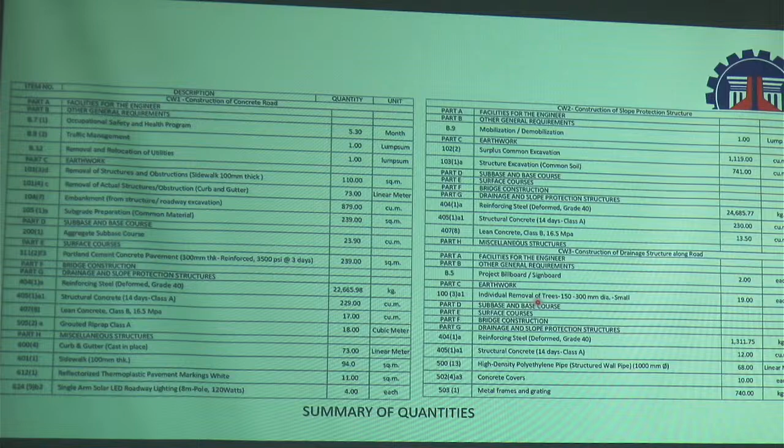So we're here at Gov. Pack Road, from Chainage 18 to Chainage 91. At the end of the project is the existing PCC pavement that leads into the entrance of the SM parking.

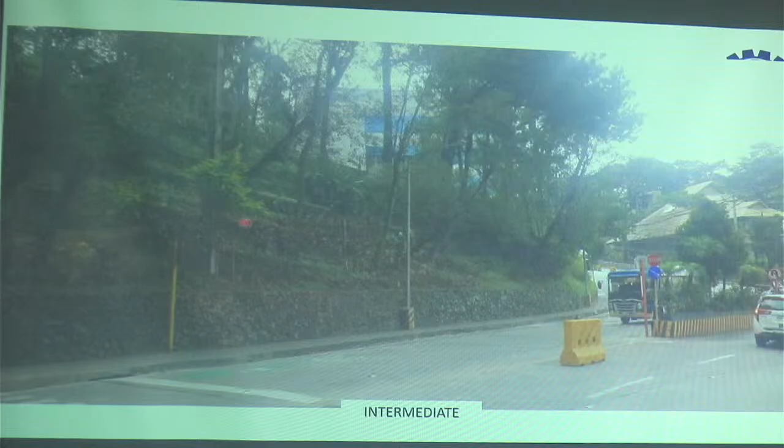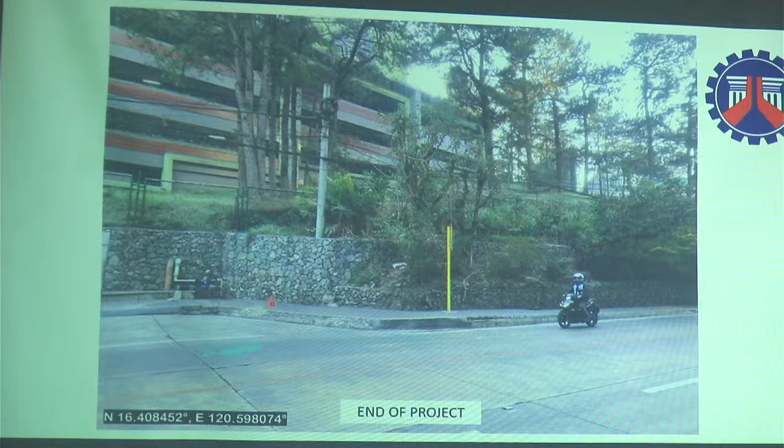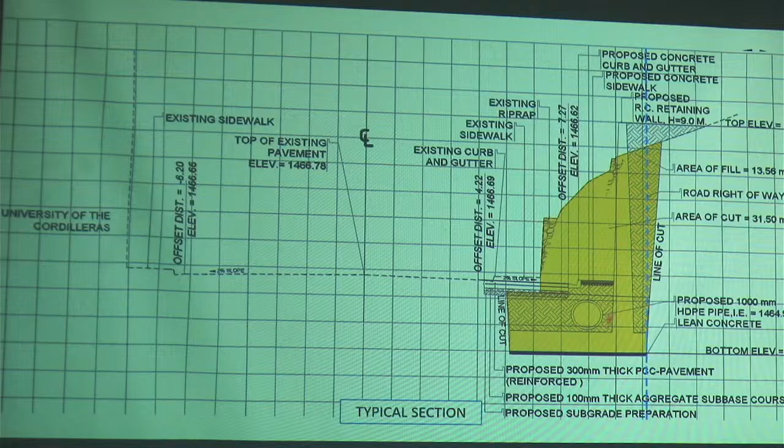This is the typical cross section showing the proposed structures: the retaining wall, sidewalk, curb and gutter, PCCP one lane, and the HDPE pipe. These are the details of our manhole covers and inlets, included in the approved plan, and the detail of our grouted riprap. The total length of the proposed riprap is 8 meters.

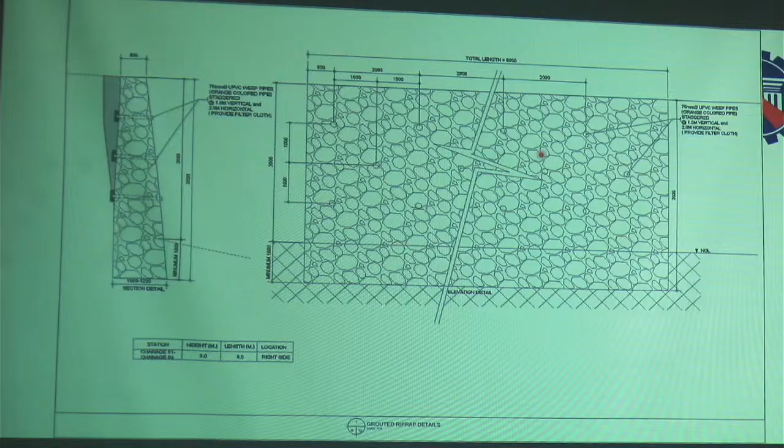For the retaining wall structures, we have a height of 9 meters equivalent to 27 meters, and also 7 meters equivalent to 23 meters, and also 9 meters on the second terrace equivalent to 15 meters. This is our detail for the solar street lights, with the specifications also included in our approved plan.

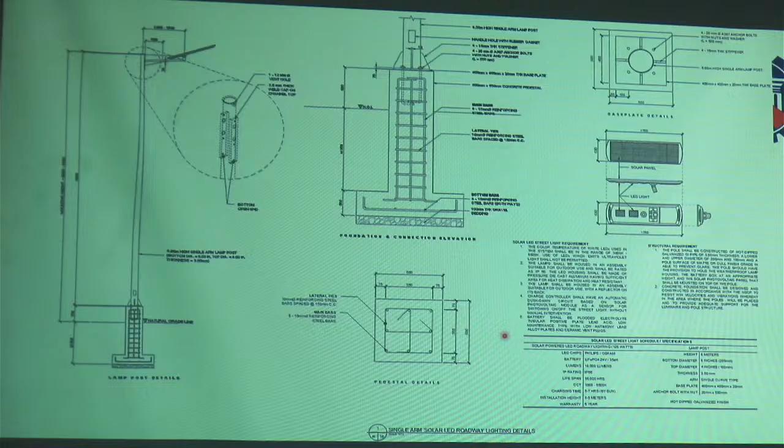So yun lang po sa ating first project with the contract ID of 26PD0027.

So for our next project, network development, road widening secondary roads, Harrison Road number 2 at Chainage 190 until Chainage 235, with a duration of 130 calendar days, with a length of 45 meters and amounting to 6,434,680 pesos. So, ito yung scope of work naman sa Harrison Road, road widening, reinforced concrete, retaining wall and grouted riprap, sidewalk, curb and gutter, HDPE pipes, and solar LED street lights.

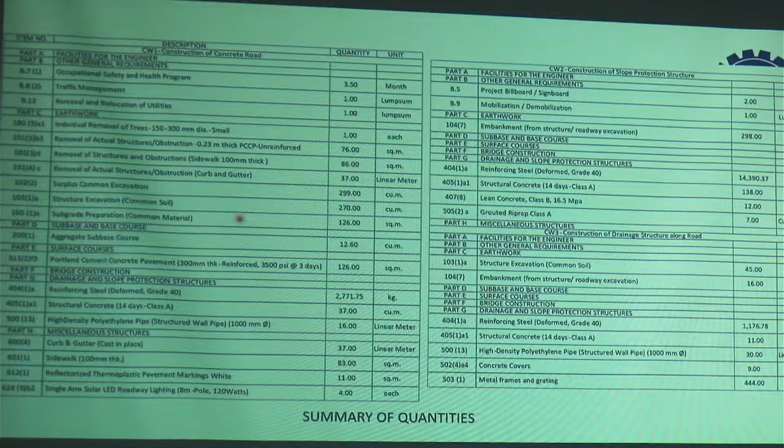So, meron tayo ditong removal of trees na 1. At yung HDPE pipes na 30 meters. At solar street lights na 4. Tapos, andyan din yung PCCP natin, including curb and gutter, sidewalk, at yung slope protection na riprap and retaining wall.

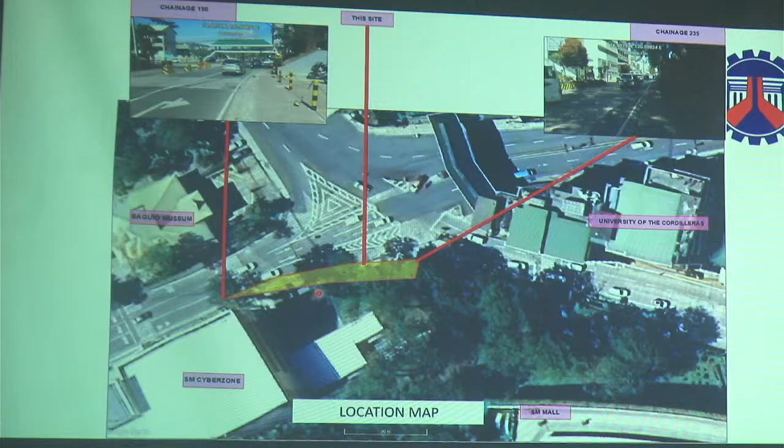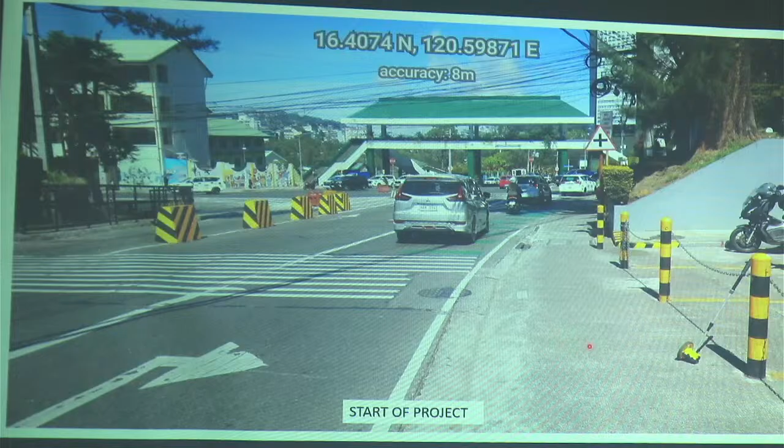So, ito naman yung project. Ayan. So, ito yung start ng project. At ito yung end naman ng project natin.

So, yung installation po ng solar street light, meron tayong located dun sa Baguio Museum. Meron tayong 2. Meron din tayong isa dun sa may entrance ng City High. Tapos, yung isa naman dito sa may intermediate ng project.

So, dun sa PCC na area, included na yung transition ng ating restoration ng driveway.

So, ito yung ating parcellary plan. Naka-indicate yung mga stationing ng mga proposed structures.

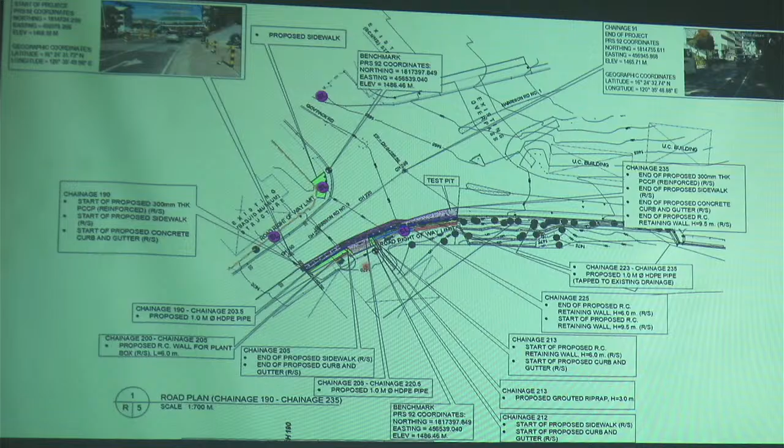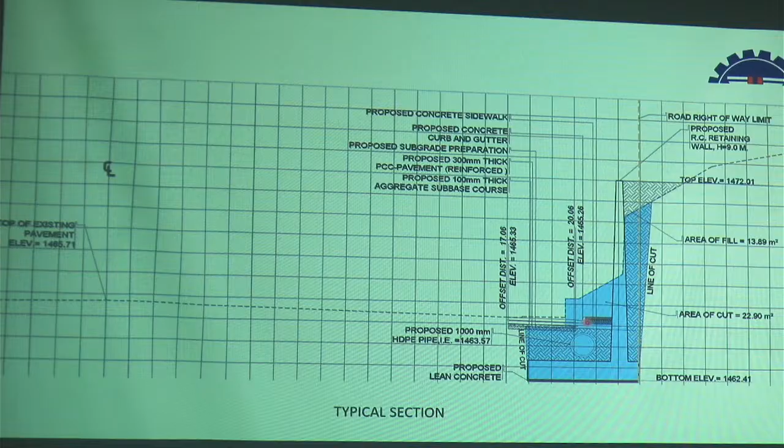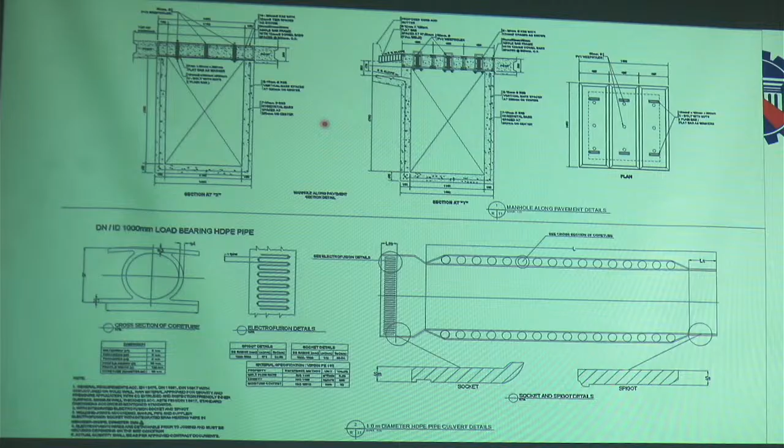At yung details ng ating manhole covers and inlets na included dun sa approved plan. At yung riprap natin with a total length of 3 meters.

So for this project, meron po tayong 9.5 meter high na retaining wall with a total length of 15 meters, and 6 meter high retaining wall with a total length of 12 meters.

At yung ating solar LED street light detail with the specifications. So ang gagamitin pala dun sa both project is 8 meter pole.

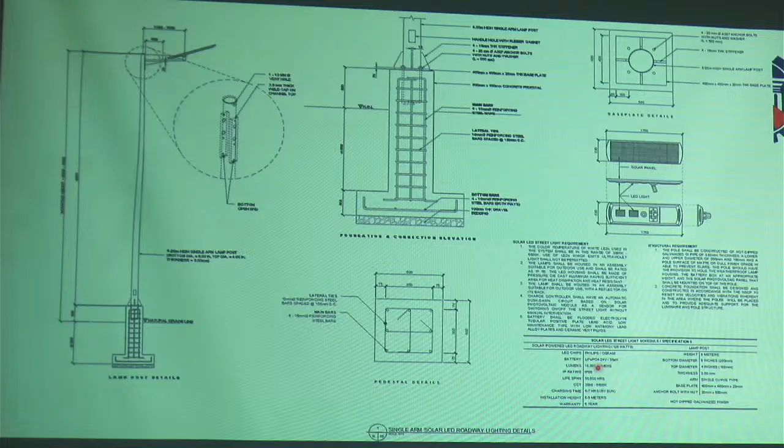So that's all for the project under 26 PD 0028.

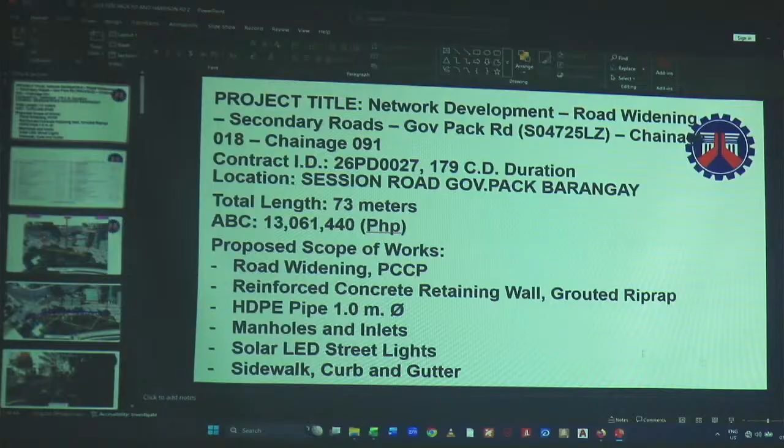So, yun po yung Project 26PD 0027 and 26PD 0028. Gov Pack and Harrison Road 2. Magkadugtong lang sila.

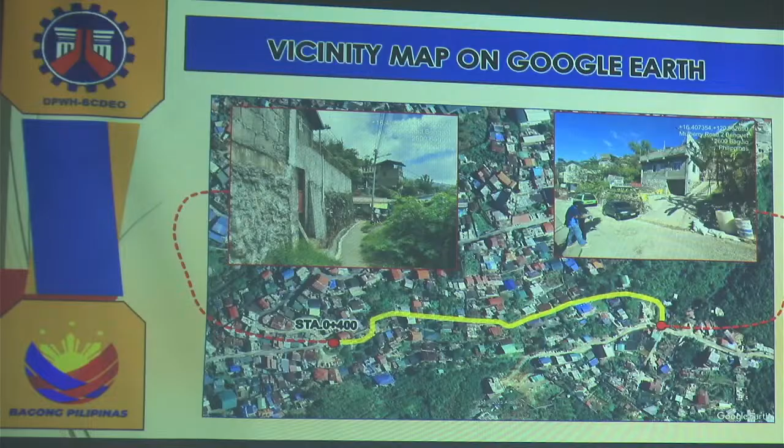This slide shows the project location. This slide presents the actual site inspection conducted along the project alignment. So ito po yung start ng project natin. And then ito po yung intermediate and then yung end po ng project natin.

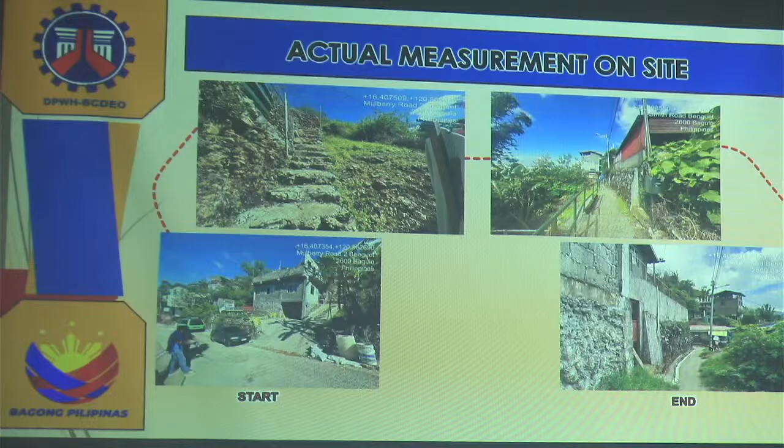Ito po yung summary of quantities. So, meron po tayong dalawang scope of work. For CW1, construction of slope protection structure. For CW2, construction of concrete road.

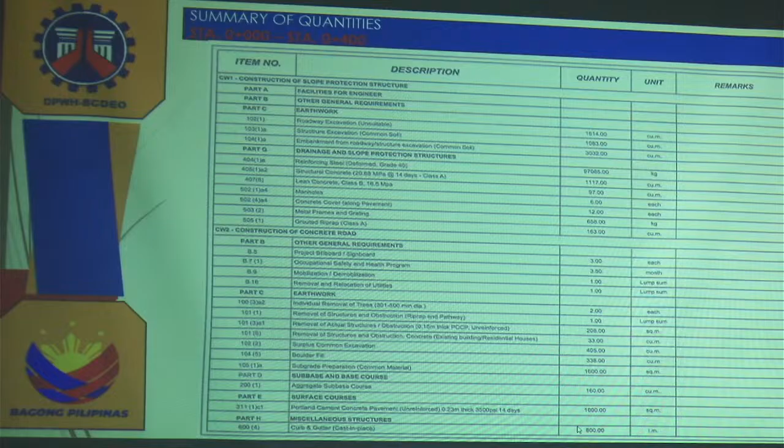Sa CW1 po, ang major po dito ay yung 4041A, reinforcing steel, and then yung 4051A2, structural concrete for retaining wall. For CW2, construction of road, 3111C1 for cement concrete pavement and may area po na 1,600 square meters.

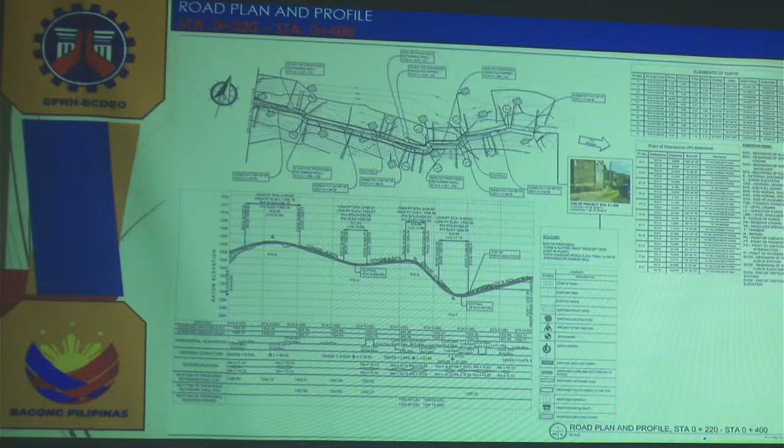Road plan and profile. And meron po tayong tatlong height ng retaining wall. Meron po tayong 4 meters, 5 meters, and 7 meters.

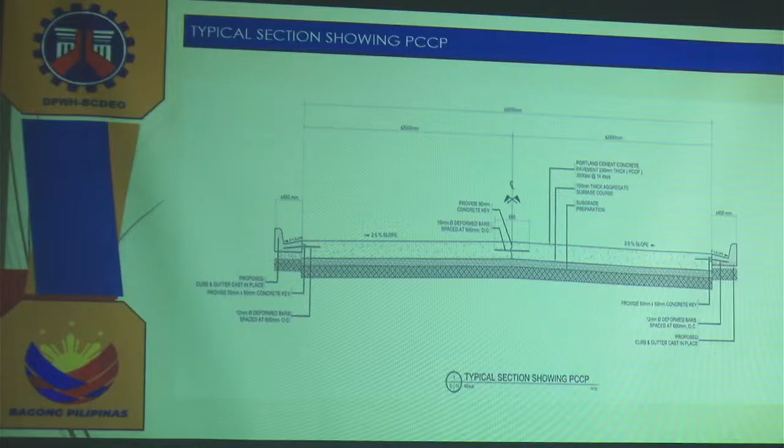Ito po yung typical section showing PCCP. The detail of curb and gutter. And the typical section showing PCCP, curb and gutter, and yung retaining wall po natin.

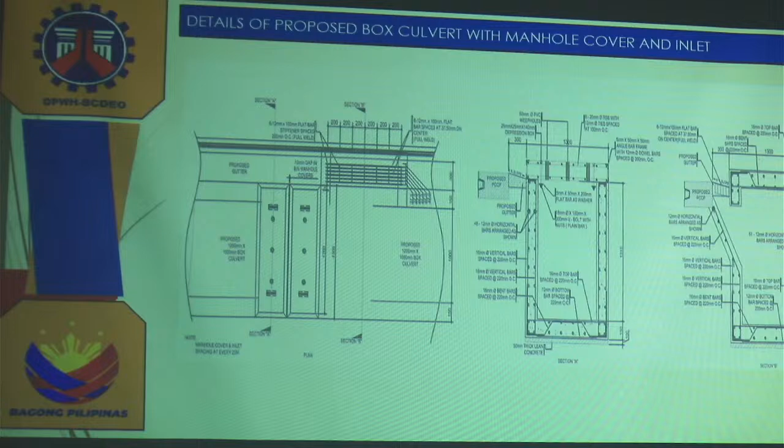Section detail of single barrel box culvert and manhole cover details. Details of proposed box culvert with manhole cover and inlet. Ito po yung grouted riprap natin.

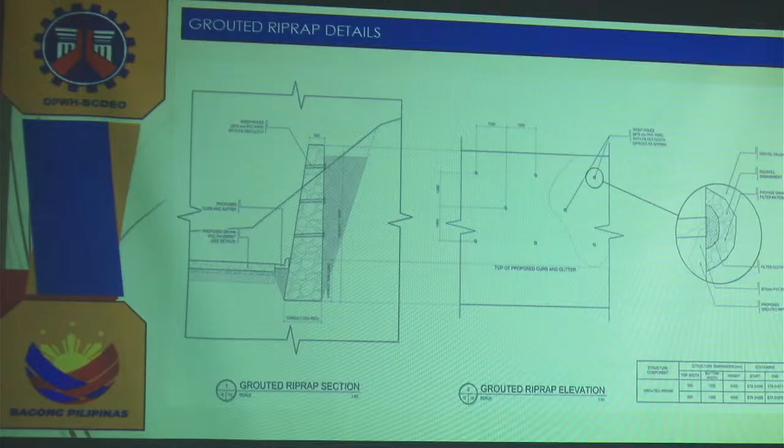Meron po tayong dalawa na station sa left side at right side. Station 0 plus 046 to station 0 plus 071 left side. And then station 0 plus 028 to station 0 plus 075 right side naman po.

Any question po for this project? Yes, ma'am. Okay na lang, Engineer Carl. Hindi, para marinig din ng online audience natin.

Sir, ask ko lang po sana kung yung mga affected na mga bahay ay may notice. Kasi parang nakita ko meron pa yata, parang half na bahay ang makukuha.

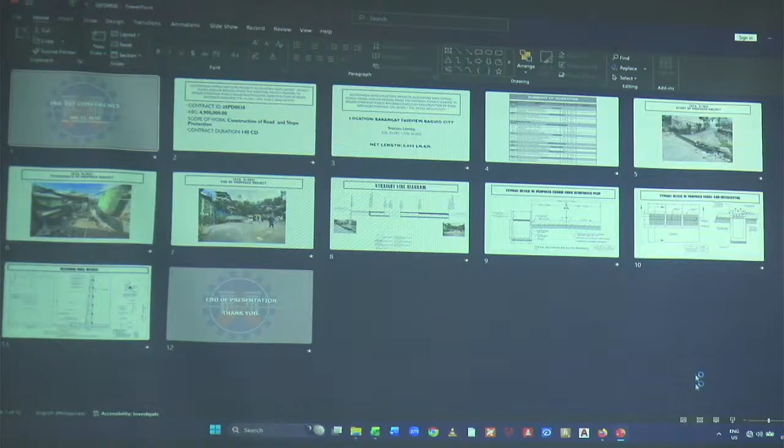Ano ba ito, sir? Ano ba? Okay. Okay, sir. Start. Hello.

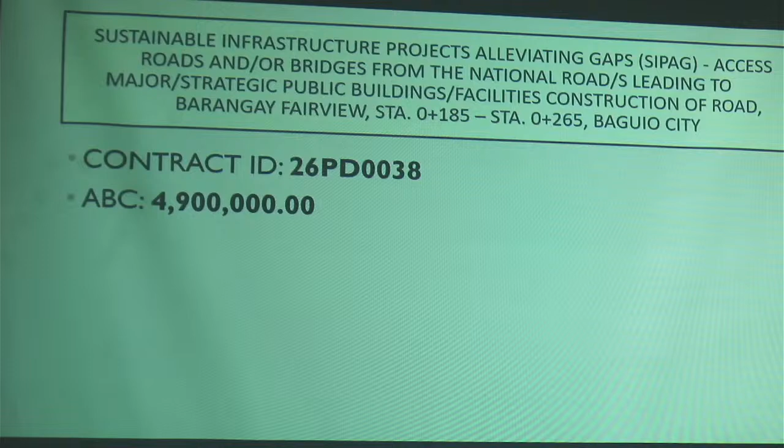So, I'm Engineer Boxijo from Construction Section. So for the project is 26 PD38, Sustainable Infrastructure Projects, Alleviating Gaps, Access Road and/or bridges from the national road leading to major strategic public buildings, facilities, construction of road, Barangay Fairview, Station 185 to 265, Baguio City. Contract ID is 26 PD38 with appropriation of 4.9 million.

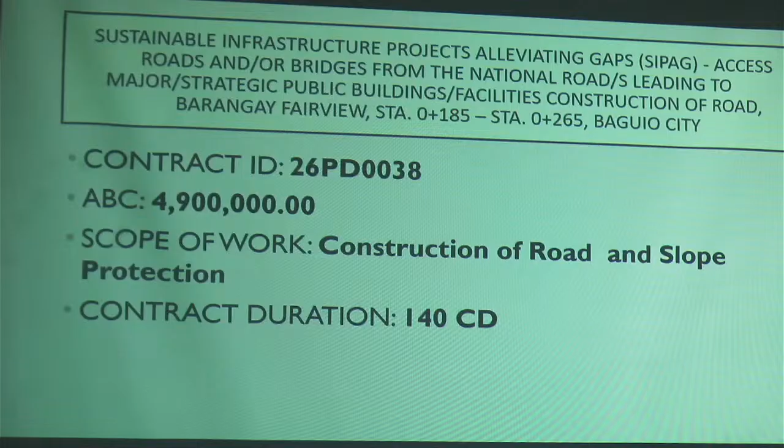Scope of work, 2 civil works for construction of road and slope protection. Contract duration is 140 calendar days. Station limits is 185 to 265, location at Barangay Fairview with a net length of 68 meters only.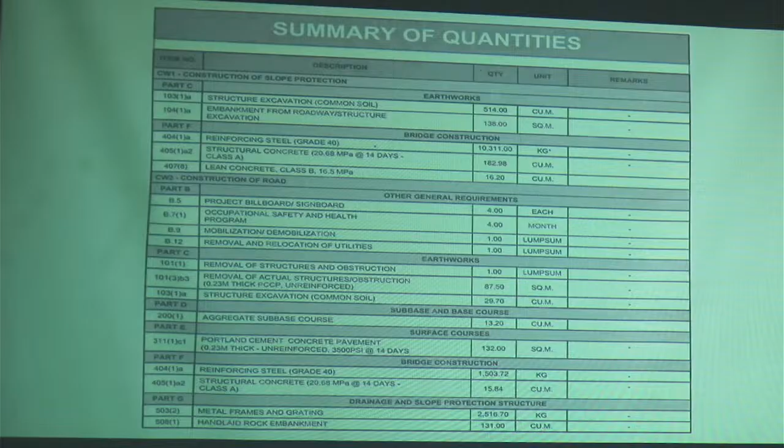So for the quantities, we have 2 civil works for construction of slope protection and construction of road as presented. So, this is the start of the project.

The start of the project consists of retaining wall, preparing of papalitan yung bago, dun papalitan ng bago itong cross drain na to, magiging interceptor I mean. Ito po yung road, so magkakaroon po ng widening dyan, 4 meters po yung wide ng road.

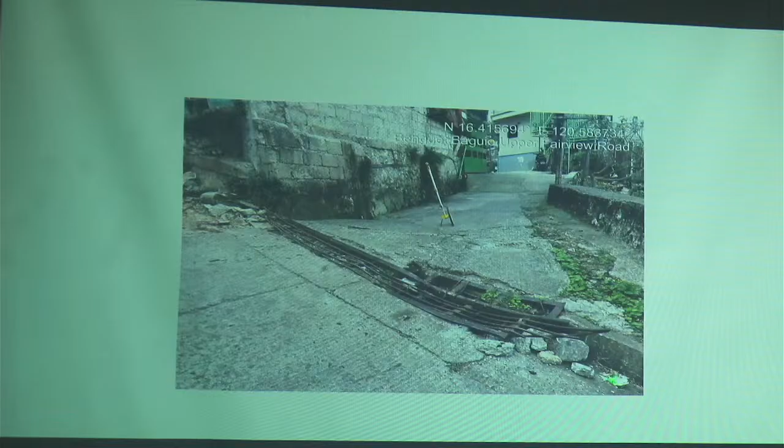Tapos ito po yung sa may intermediate of the proposed project, gitna ng project from station 245. Bale, both side meron pong retaining wall kasi magkakaroon po ng paghihilot dyan sa may road.

Papalitan din po natin tong existing fence na contract ni mga bahay. Coordinated din po sa mga may bahay dito na mababawasan yung mga fences nila.

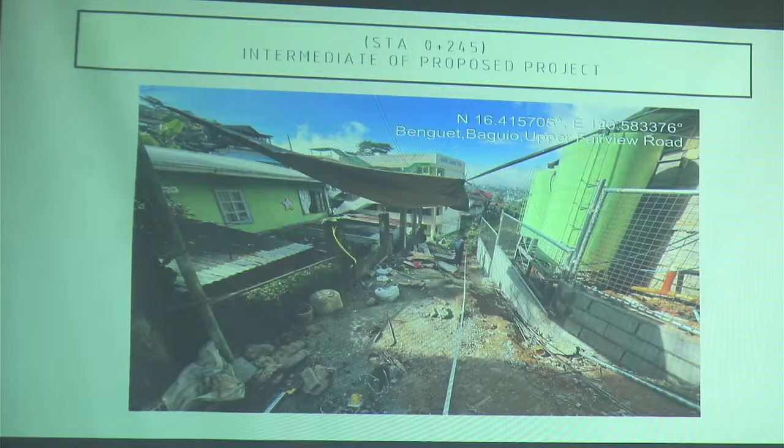So, end ng proposed project, dito po yung sa may pang 68 meters niya po. Dito po, going po yan dito sa may school ng elementary ng Fairview. Bale, dito po ihilutin yung road going up po.

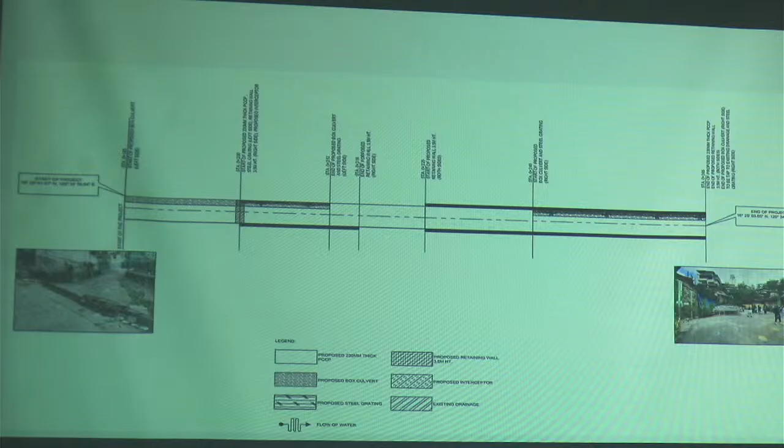So, ito po yung straight line diagram. Start ng proposed ng project with box culvert, station 200. Dun po yung start ng road, interceptor, retaining wall, and yun po.

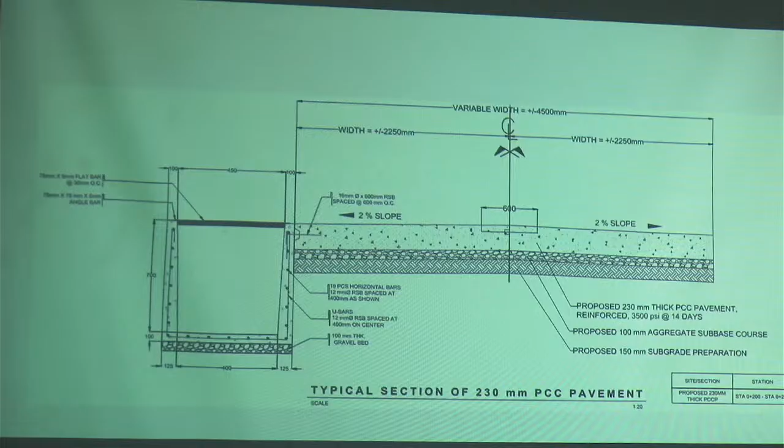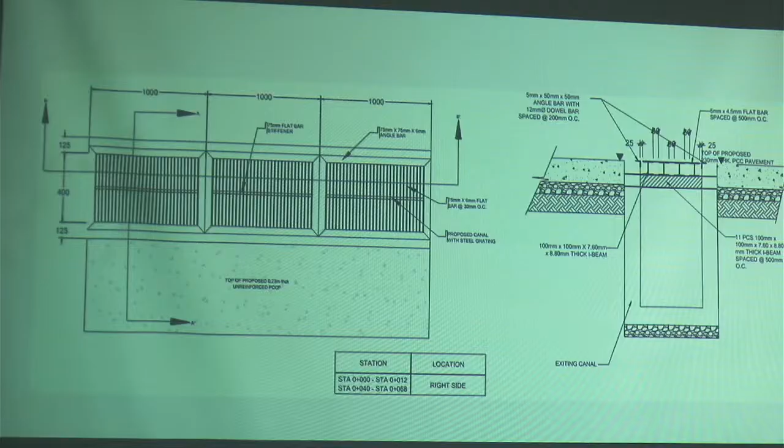So, typical dimension of the PCCP, 230 mm po yung thickness from station 200 to 265 ang PCCP. Ito po yung proposed na interceptor details po and inlet gratings. So for the retaining wall, 3.5 po yung height niya using grade 40 only po na mga bakal. And that's all. Thank you.

Any question po? The floor is open for question and clarification for this project. Do you have any questions? So, none po.

So, we have some important reminders also. Please be reminded of the following. We will read some important points in the invitation to bid. For contract ID 26PD0027, go back.

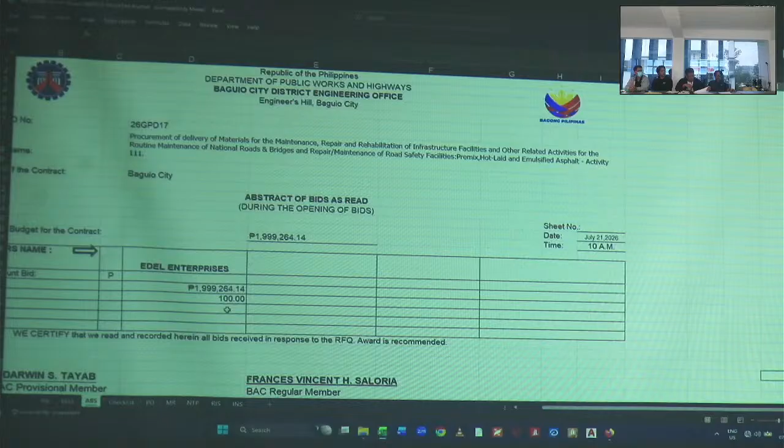For the infra project, the BAC members are Norman C. Estolas, Frances Vincent H. Saloria, and Roydin Mark D. Pasqua. We are 3 out of 5, so we have a quorum again.

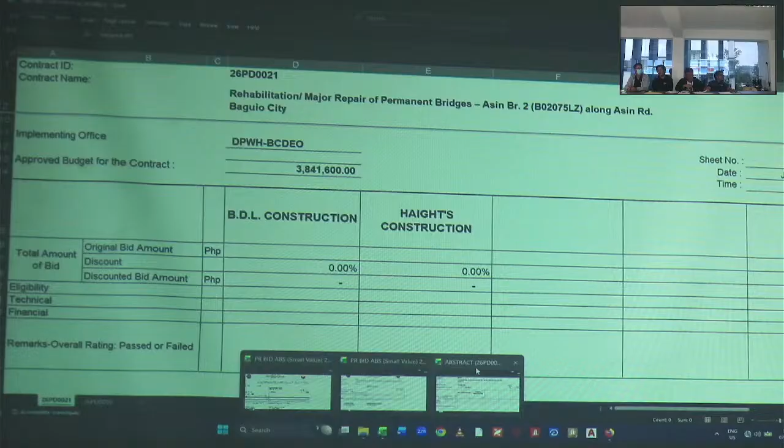So I will read the project. For the goods, we have 26GPD18, procurement of delivery of reflectorized traffic paint and road safety signages for the maintenance, repair, and rehabilitation of infrastructure facilities and other related activities for the routine maintenance of national roads, bridges, and repair maintenance of road safety facilities. Activity numbers 301, 303, and 309. We have an ABC of 1,962,961 pesos and 72 centavos.

We invited three suppliers, namely Edel Enterprises, Dapli Enterprises OPC, and Raf Road Construction. However, only one bidder submitted a bid, namely Raf Road Construction.

For 26GPD17, procurement of delivery of materials for the maintenance, repair, and rehabilitation of infrastructure facilities and other related activities for the routine maintenance of national roads and bridges and repair maintenance of road safety facilities, premix hot-laid and emulsified asphalt, activity 111. We invited three, namely HDG Construction and Enterprises, Goldrich Construction and Trading, and Edel Enterprises. However, only Edel Enterprises submitted a bid.

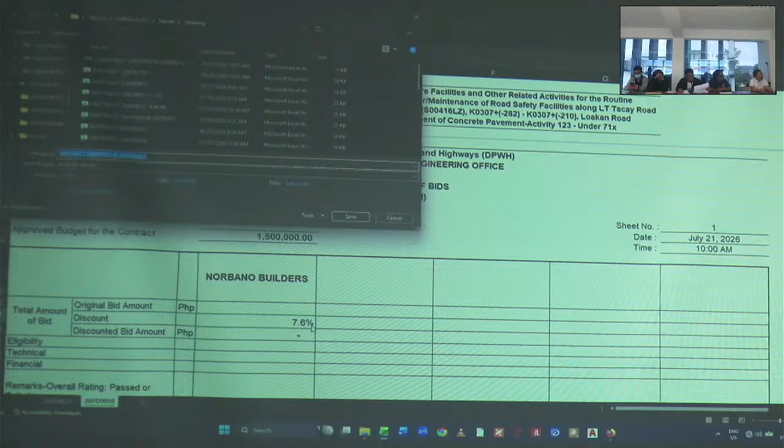For the maintenance project, we have 26PD0050, maintenance, repair, and rehabilitation of infrastructure facilities and other related activities for the routine maintenance of national roads and bridges and repair maintenance of road safety facilities along Lieutenant Tacay Road, K0308+050 to K0308+107, Bukaukan Road, K0307+(-282) to K0307+(-210), Loakan Road, K0249+(-046.5) to K0249+(-027), replacement of concrete pavement, activity 123 under 71X.

Only one bidder submitted a bid, Norbano Builders. This project has an ABC of 1,500,000.

For the infra project, we have 26PD0021, rehabilitation, major repair of permanent bridges, Asin Bridge B02075LZ along Asin Road, Baguio City, with an ABC of 3,841,600 pesos. We have two bidders who submitted their bids, namely BDL Construction and Haight's Construction.

May I request the BAC Secretariat to open the technical component of the bids for the goods, maintenance projects, and infra project.

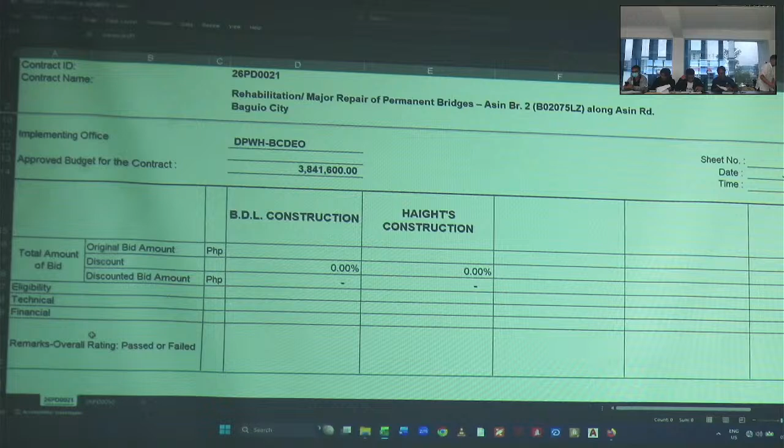valid until December 31, 2026. DTI, valid until October 14, 2026. BIR tax clearance certificate, valid until June 13, 2026. However, in his submitted list of eligibility documents, expiration date of the tax clearance is July 8, 2027.

PhilGEPS registration, valid until July 16, 2026. However, in his submitted list of eligibility documents, expiration date of PCAB license is February 6, 2027.

For his technical and financial aspects, PCAB license valid until June 6, 2027. PCAB registration valid until August 13, 2028.

Sa PhilGEPS registration, July 16, 2026. As per certificate of PhilGEPS registration, it is valid until July 20, 2027. Copy, ma'am.

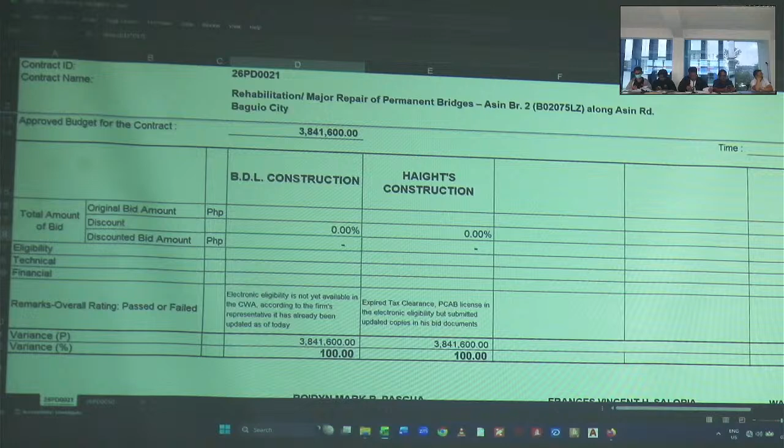As per preliminary examination, using the non-discretionary pass or fail criterion. Requirements, certificate for Raf Road Construction. Requirements, certificate of PhilGEPS registration or registration number, pass.

BIR certificate of registration, pass. NGPA omnibus sworn statement, pass. Income or business tax return, pass. So all the technical components are present, so we will be complying.

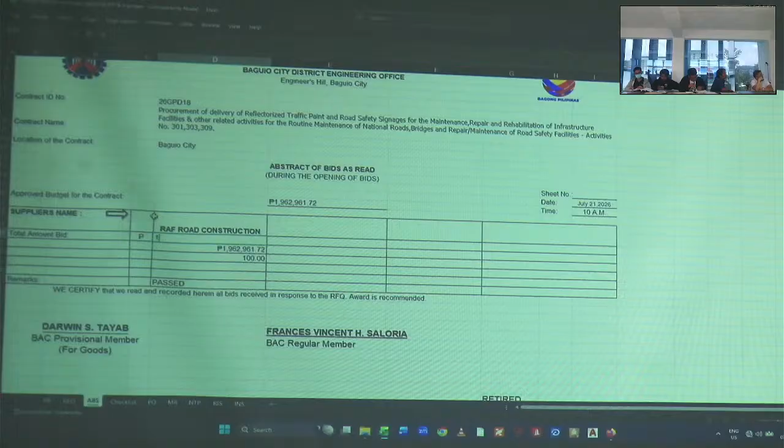So we will read its offered bid. The offered bid is read as 1,943,000 pesos only. No discount offered.

Sir Darwin, can you confirm? To confirm the bid of Raf Road Construction Supplies and Trading, his bid is 1,943,405.

So sorry, so that's 1,943,405 pesos only. No discount offered.

Confirm again. To reconfirm what was read and declared by the Vice Chairman, the bid is 1,943,405 pesos only.

For 26 GPD 17, Edel Enterprises, for the technical component requirements, certificate of PhilGEPS registration or registration number, pass. BIR certificate of registration, pass. NGPA omnibus sworn statement, pass. Income or business tax return, pass.

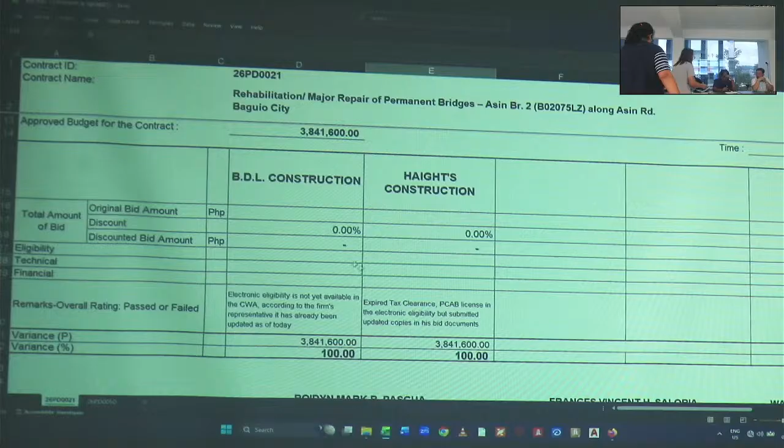PD 0021 for Haight's Construction. All the technical component or documents of Haight's Construction are present and complete. BAC declares complying. And for BDL Construction, all the technical component or documents of BDL Construction present and complete, so BAC declares complying.

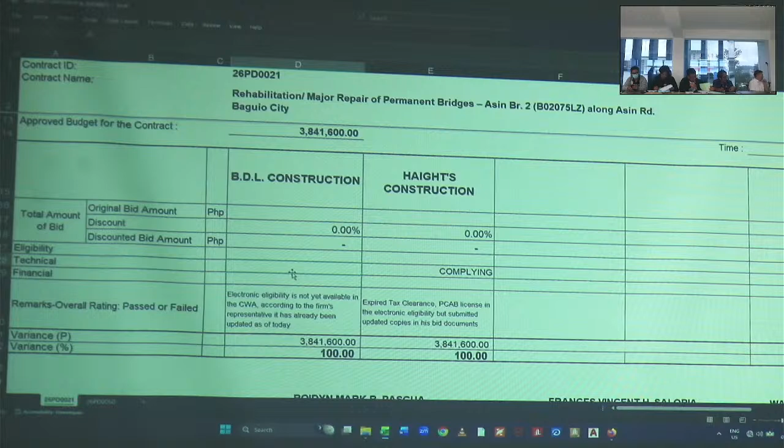I would like to request also for the financial component of the two bidders for 26 PD 0021 to be open.

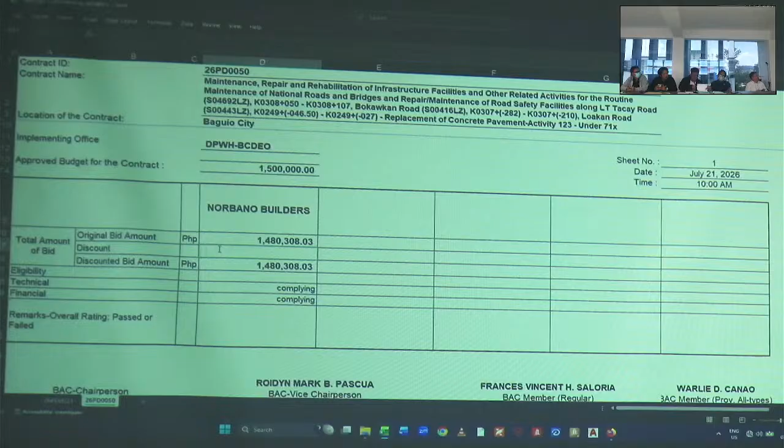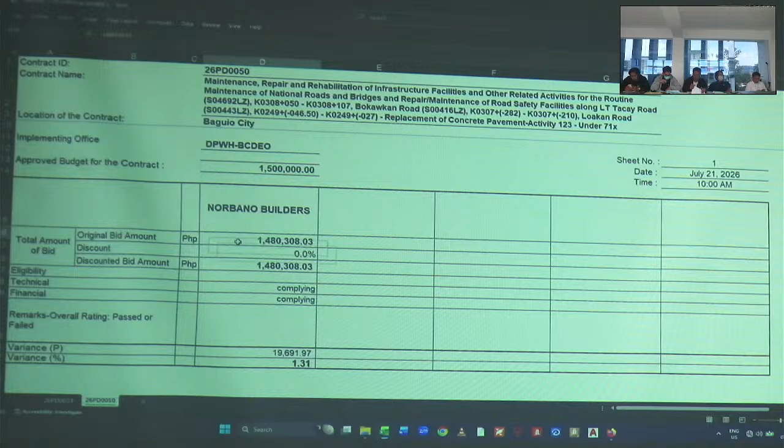For confirmation, the offered bid of the Norbano Builders is in the amount of 1,480,308 pesos and 3 centavos only. No discount offered, the same as declared by our Vice BAC Chairperson.

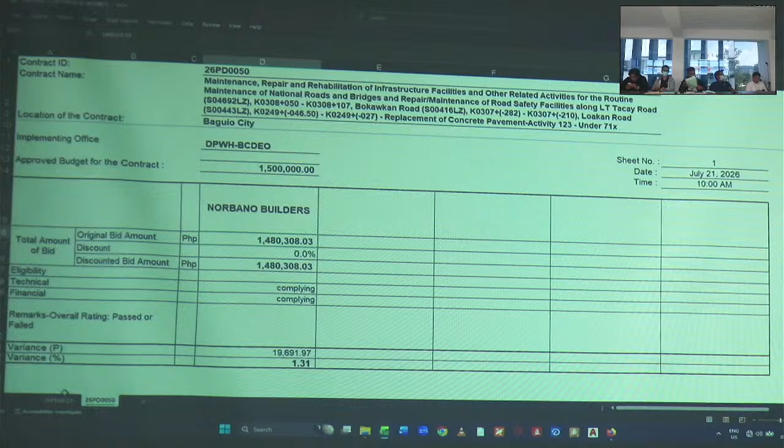For 26 PD 0021, contractor is BDL Construction. All the financial documents of BDL Construction are present and complete. So BAC declares complying. So we will read the offered bid of BDL Construction.

The offered bid is read as 3,835,996 pesos and 26 centavos only. No discount offered.

Engineer Frances, can you confirm? For confirmation, the offered bid of BDL Construction is 3,835,996 pesos and 26 centavos only. No discount offered, the same as declared by our Vice BAC Chairperson.

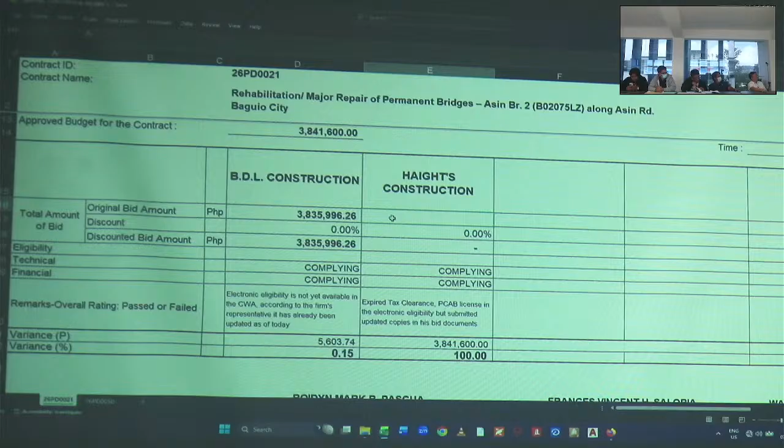For the same contract ID, name of bidder is Haight's Construction. All the technical component, all the financial component of Haight's Construction are present and complete. So BAC declares complying. So we will read the offered bid. The offered bid is read as 3,612,612 pesos and 12 centavos.

Correct? No discount offered. Engineer Frances, can you confirm?

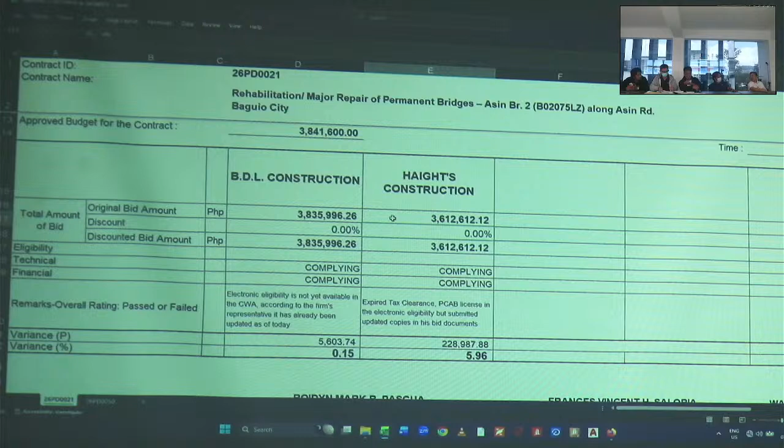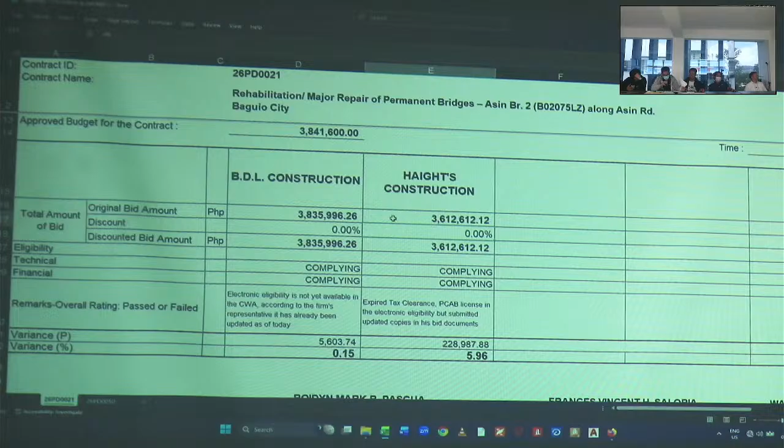Bid of Haight's Construction is 3,612,612 pesos and 12 centavos. No discount offered, the same as declared by our Vice BAC Chairperson.

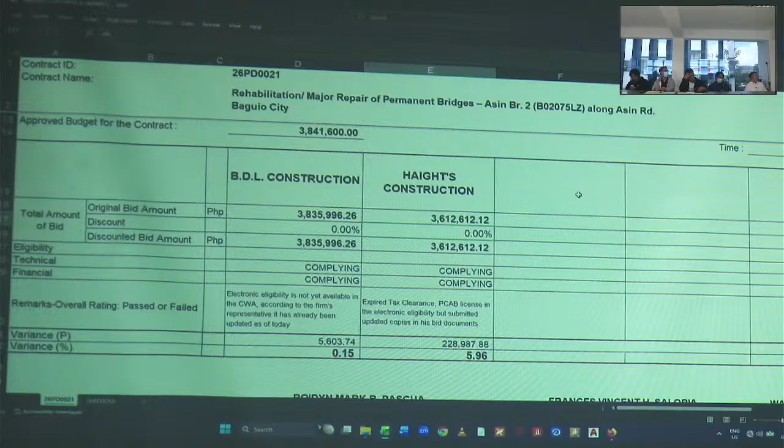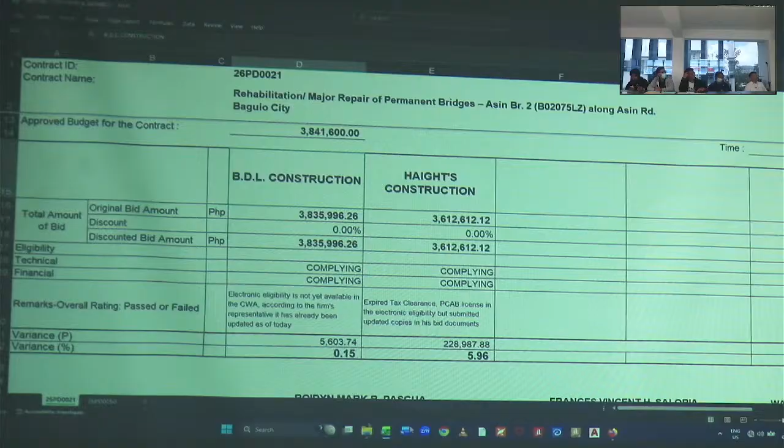The declaration of the lowest calculated bid or the single calculated bid is subject to bid evaluation and post-qualification to determine the lowest calculated bid, the lowest calculated responsive bid, or the single calculated responsive bid.